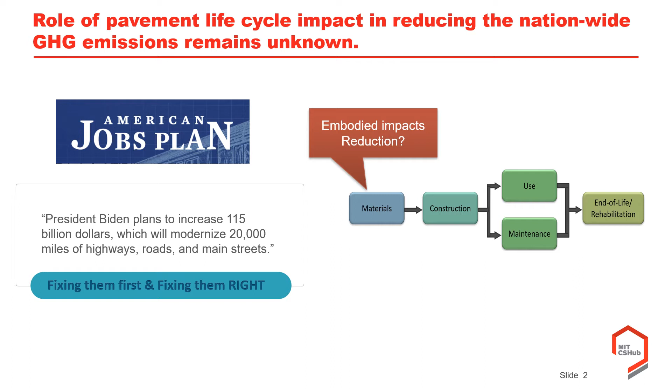We can think about how to manage and build pavements to reduce the use and end-of-life environmental impacts. For example, by making pavements more reflective, we can have GHG savings, or maintenance and repair actions can make the pavement surface smoother, therefore less fuel consumption induced by the pavement surface characteristics. And at the end of life, we can use the recycled content to minimize the primary materials production.

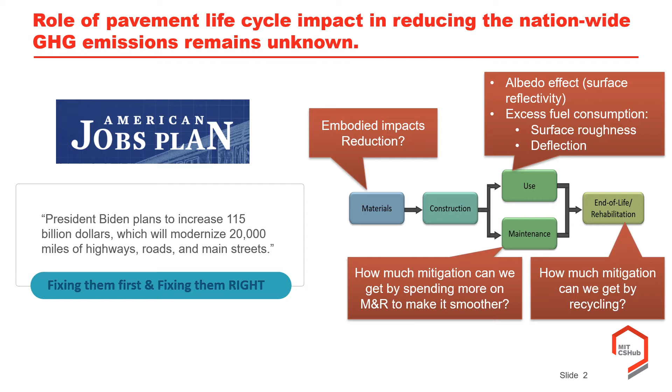Therefore, we decided to investigate the role of life cycle environmental performance of the US pavement in mitigating the GHG emissions. And for this purpose, we defined and developed a bottom-up approach to investigate the environmental impacts of the pavement life cycle for each individual road segment. So as you can see on this screen, this approach comprises a nationwide analysis.

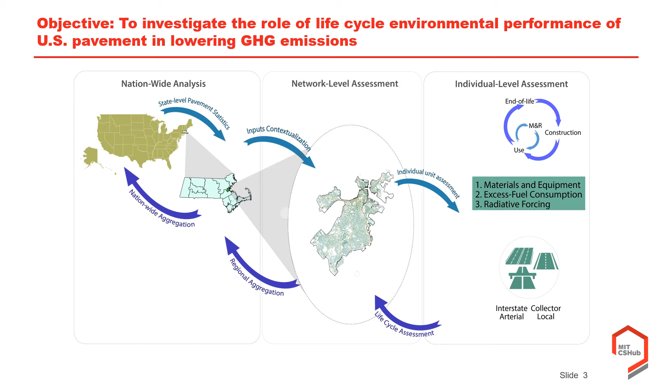We collected the data related to the pavement statistics in each state, and then we contextualized the input in the network level, including the climate conditions, the local maintenance and repair actions, and materials used for pavement rehabilitations. And with the individual assessments of the segments, we incorporated life cycle assessments to quantify the environmental impacts of the road network. And with regional aggregation and nationwide aggregation, we could achieve the total life cycle GHG emissions of the road network in the United States.

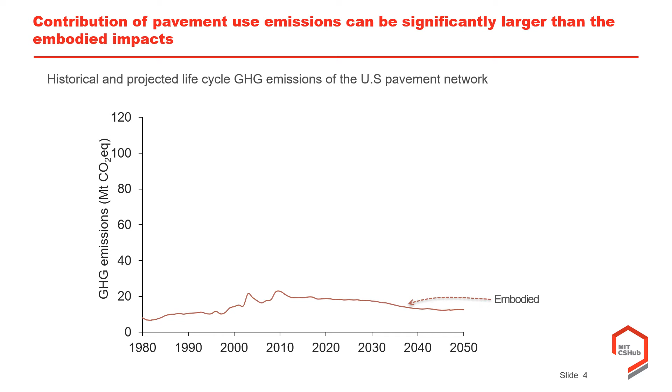So here I would like to show you the nationwide results of the total life cycle GHG emissions of the US pavement network. On the y-axis, you can see the annual GHG emissions in terms of million tons CO2 equivalent, and on the x-axis, you can see the year, starting from the embodied impacts related to the new construction, maintenance, and repair actions on the road. We can see that the embodied impact is around 20 million metric tons CO2.

The deflection-induced fuel consumption is very similar to the embodied impact, while the roughness-induced fuel consumption is twice bigger than the embodied and excess fuel consumptions, implying the importance of the use phase incorporation in the pavement life cycle assessment and in the decision-making for pavement decarbonization.

The albedo effect, which includes the reflectivity of the pavement, was also around 20 million metric tons per year. And if we sum up all these values, we can see that the total life cycle GHG emissions of the pavement network in the United States is around 90 to 100 million tons CO2 per year.

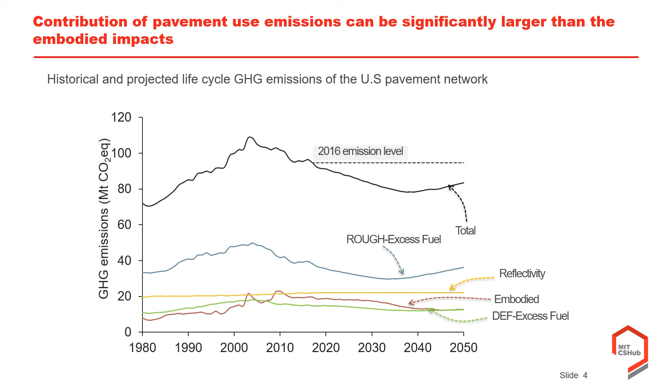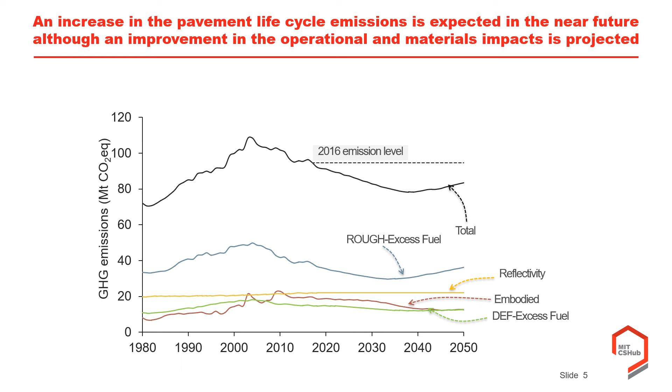The other important observation from this result is that compared to the 2016 level emissions, we can see a decreasing trend, and then we see that the trend is going to be increasing in the future after a while. And this is because the vehicle fuel efficiency and partial replacements of the virgin materials with byproducts can reduce the GHG emissions of the nation in the future, but the demand increase and the traffic volume increase will dominate the other factors. Therefore, after 2038, we can expect an increase in the total GHG emissions of the pavement life cycle. And it implies that we need to take actions to reduce these GHG emissions.

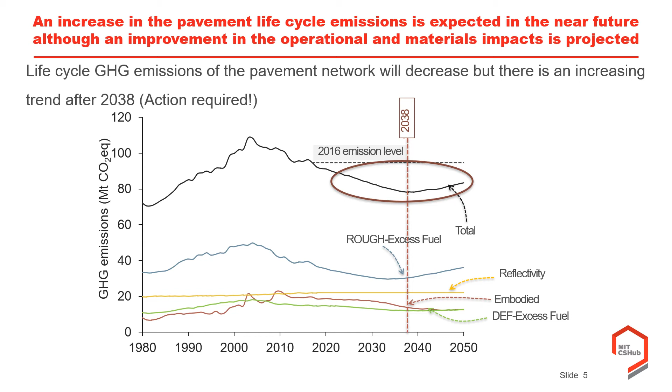To reduce the GHG emissions of the pavement life cycle in the future, we propose 6 different ambitious actions. These ambitious actions include achieving net zero GHG mixtures, both for asphalt and concrete, by 2050, which would reduce the materials production and construction GHG emissions. We can have concrete overlay actions added to the maintenance and repair actions of the DOTs and municipalities. So we can have some benefits in the use phase in terms of the GHG emissions, but we may have some extra GHG emissions and burdens for materials production and construction.

We can have an extension for the end of life carbonation, meaning that we are leaving the stockpiled demolished concrete for a longer period of time, so we have more carbon dioxide absorbed from the atmosphere. We can have an increase in the budget, which will give us a smoother road surface. We have less excess fuel consumption induced by the roughness, but we have to spend more materials and construction equipment to provide that level of smoothness.

Increasing the stiffness can reduce the deflection and excess fuel consumption, but materials production and construction would have some environmental burdens. And finally, increasing the surface reflectivity using reflective materials can effectively reduce the environmental impacts of the pavement during its use, but we may need to have some materials for making that pavement more reflective.

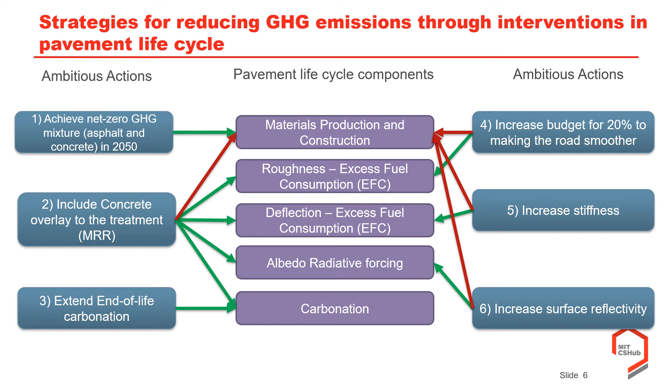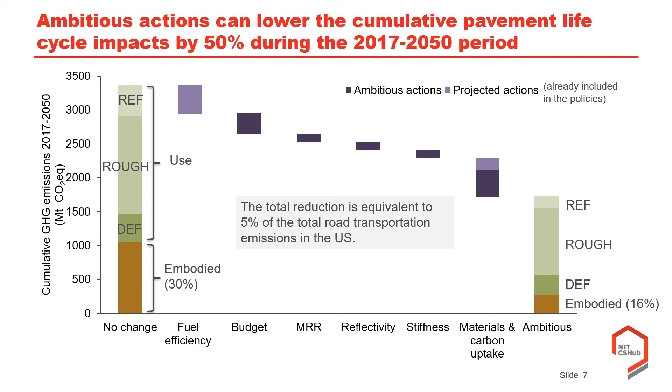After the implementation of the ambitious actions, the dark purple color bars, in addition to the projected actions that are already included in the policies of the nation, the light purple color, we can see that 50% reduction is expected by 2050 under the ambitious scenario. And only 16% of the total life cycle emissions is attributed to the embodied impact. This amount of reduction is equivalent to 5% of the total road transportation emissions in the US during the same period of time. And as you know, road transportation is the largest contributor to the GHG emissions of the nation. Therefore, reducing these emissions by 5% only by pavement is a big contribution from the civil engineering community.

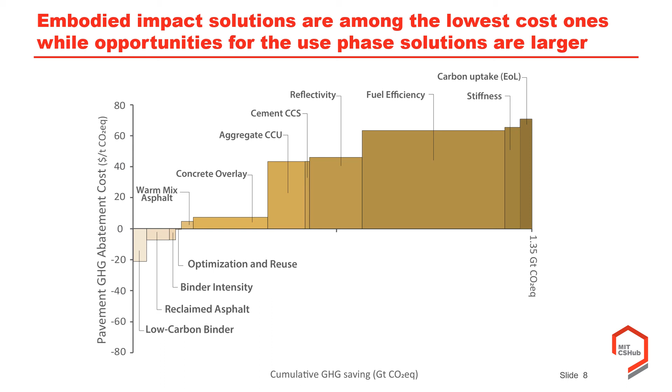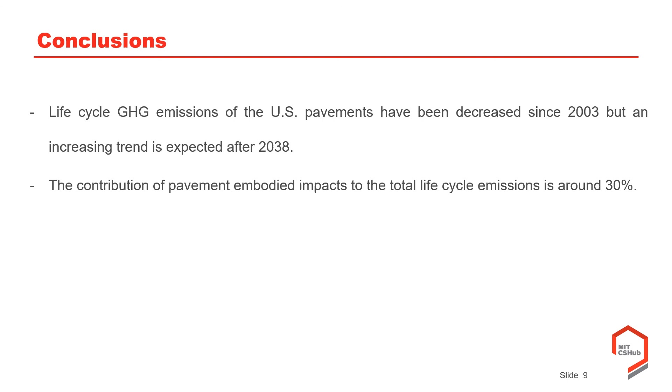So to conclude this study, based on our analysis, we found that in the near term, we have a reduction in the environmental impacts of the total pavement life cycle, but there is an increasing trend in the medium term. Therefore, we need to take action to reduce these environmental impacts. Then the contribution of pavement embodied impacts is around 30% of the total life cycle GHG emissions under the no change scenarios, implying the importance of simultaneously considering the embodied and use phase impact.

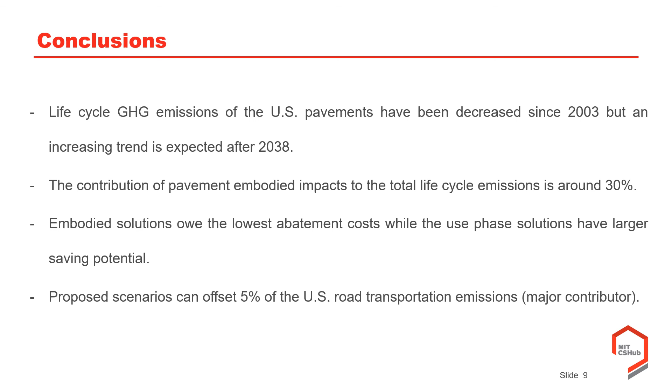The embodied solutions have the lowest abatement cost. Therefore, we need to prioritize these solutions in the short term, while the use phase solutions have larger saving potential. The improvement in the technologies will help us reduce the abatement cost for the use phase, and therefore we can have more flexibility to reduce the environmental impacts. And at the end, the proposed scenarios could offset 5% of the total road transportation GHG emissions, which is the major driver of GHG emissions in the United States.